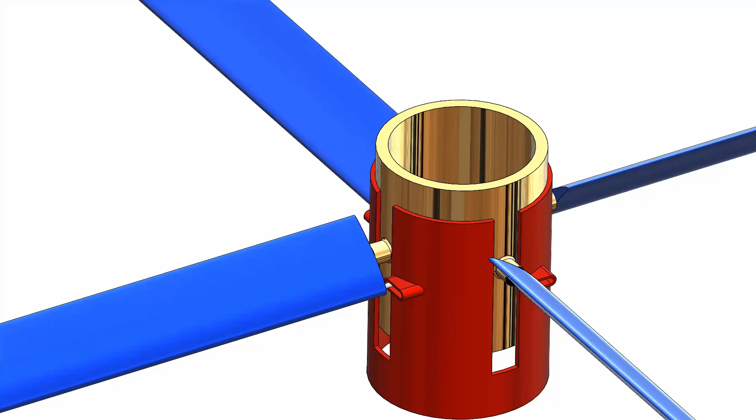Namaste guys, in this video we are going to learn how to make this rotor head mechanism in SolidWorks. We are going to make it completely from scratch and you are going to learn a lot of things.

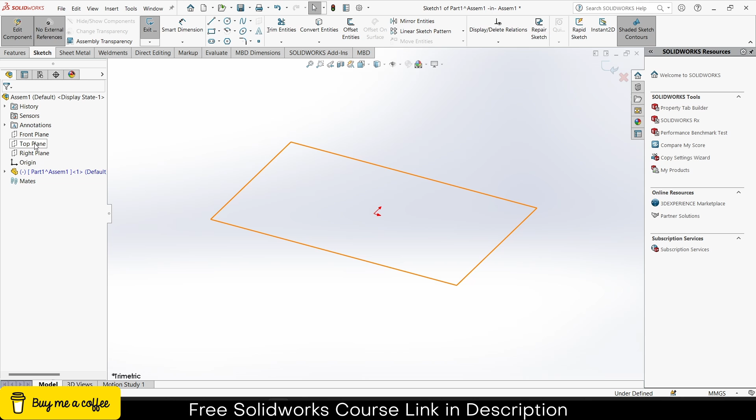So let's start. As you can see, I am currently in assembly mode. I am going to make all my parts in assembly mode for the sake of simplicity. Let's see how to approach this. First, click on Insert Components, click on New Part. Select the top plane, press Ctrl plus 8 for normal to the view.

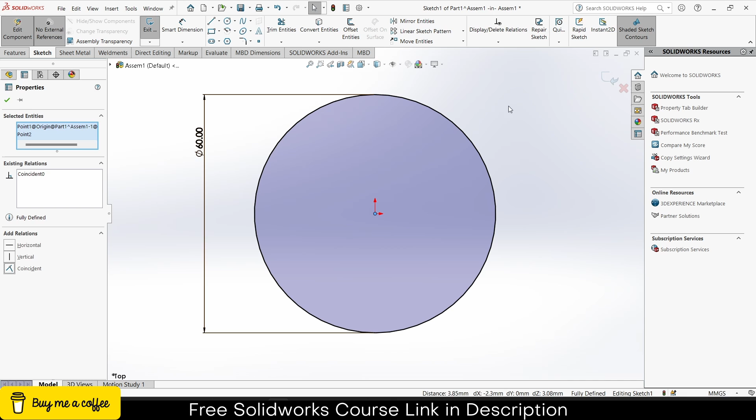Click on the circle. Now draw a circle as per your requirements. In my case, I am making it 60 mm. Press Escape. Now, as you can see, the circle color is blue, so it means it is not fully defined. So what I will do is drag this by pressing Ctrl, select the origin, and click on coincident. Notice now the sketch color is black, which means it is fully defined.

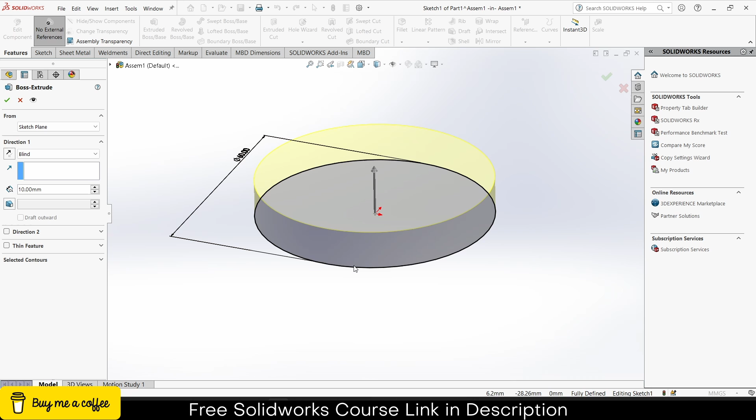Now go to the features, click on extrude. Now I want to create a hollow pipe, but it is not hollow, so what I will do is click on thin feature. I got some thickness. Now here I will increase some height—you can increase or decrease the height as per your requirements. So I'm making the height 80 mm and let's say the thickness is 5 mm. Click OK.

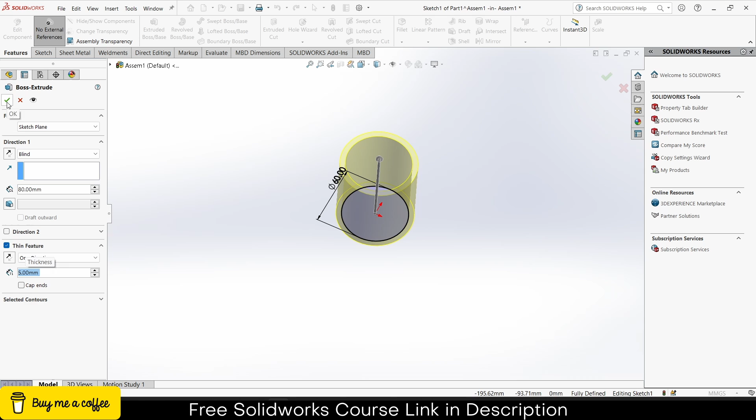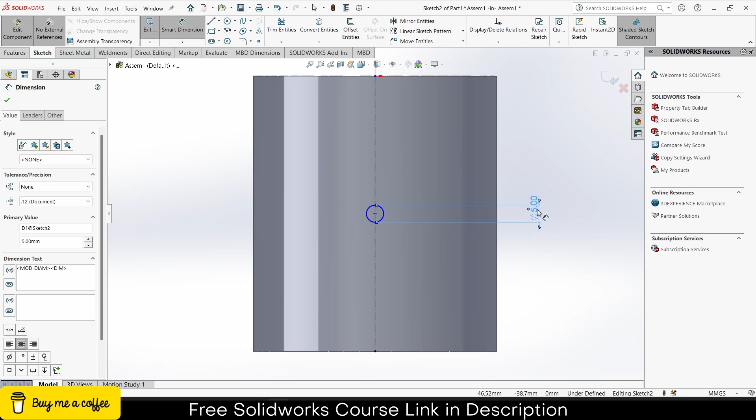Now I will select the front plane of the part, draw a center line here, press escape, click on circle, and draw a circle at the center of it. Give it a diameter as per your requirement—in my case, 5 mm is fine. Click OK.

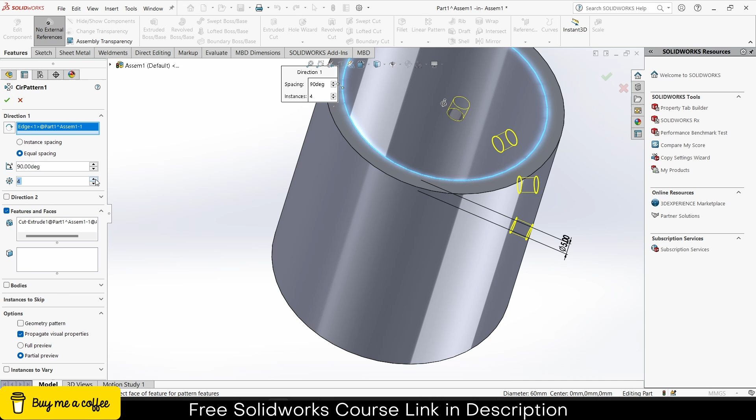Click on extrude cut, through all, click OK. But I want 4 more extrude cuts. What I can do is click on circular pattern, select the circular edge, and increase the number of instances. Notice some weird thing happening at 90 degrees, something like this. So basically I have to change it to 360 degrees.

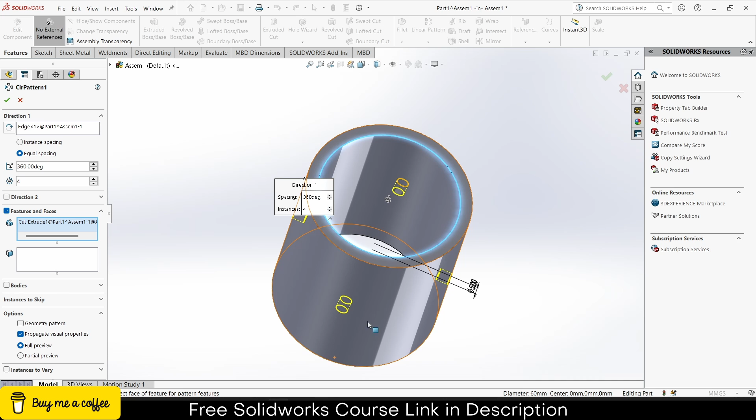In your case, it might be default 360 degrees and you'll get the correct results. Just in case it's not showing, make sure you go to features and faces and select your extrude feature—after that it will show you. If it's still not showing, make sure you click on full preview so it will show how it looks once you cut it. Now click OK. Notice it's cut—that's a good thing.

Again select the top plane, click on sketch. Now I will draw a circle here of the same size. Go here, extrude.

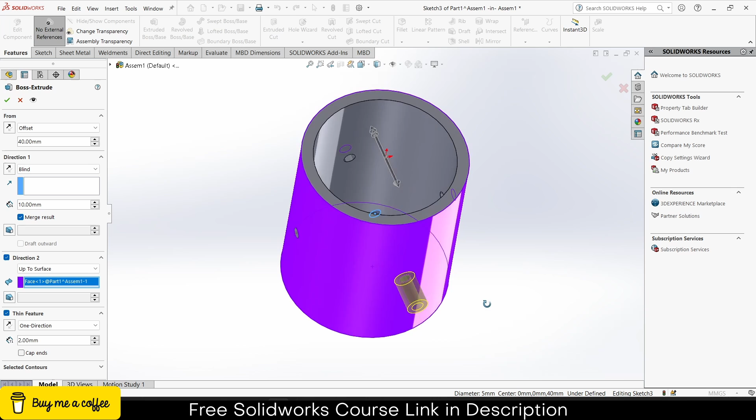Now instead of blind, click on thin feature, click on offset. What I am doing in reality is I want to extrude on this curved surface, but you can't make a sketch on a curved surface, so we are going to use some tricks. Let's make the thickness 2 mm, and in direction 2 click on up to surface, select this surface, and let's say this is 3 mm. Click OK. So this is how it looks like.

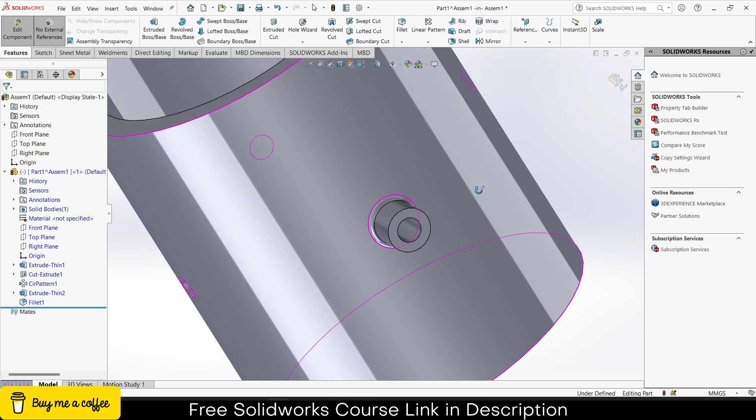Looks okay. Select this, click on fillet. Make it 1 mm, click OK. Now what I will do is click on circular pattern, select this, and select this feature and this feature.

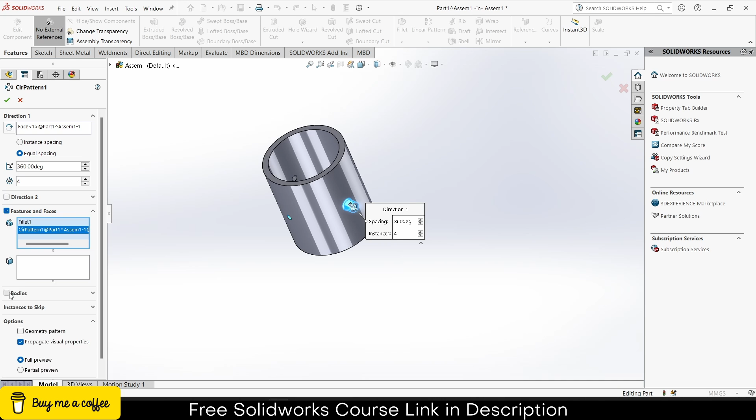Click OK. Unable to create instances, try again by decreasing this. If that sometimes happens, click on bodies. There are some chances, sometimes things don't go as the way you want. Okay, okay, my bad.

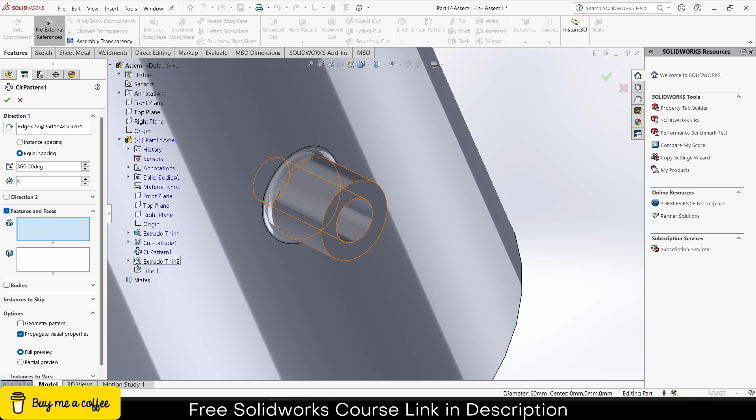Features, cancel this and select this. Delete this. Let's try to select the features from here. Now it's working. Sometimes you face different kinds of issues, so you have to make a habit of learning it. So click exit, that assembly component mode.

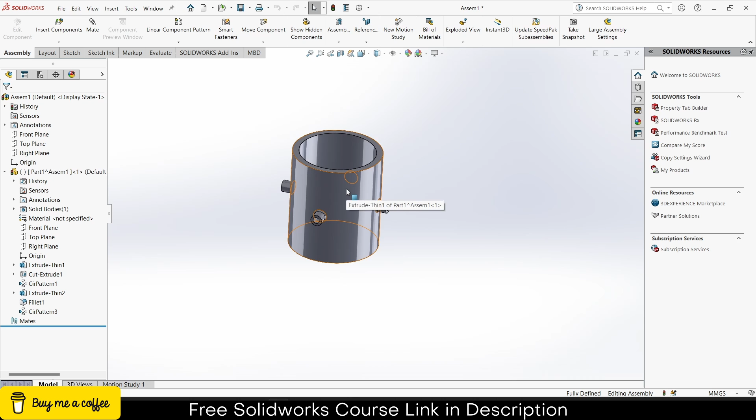So we made our first part. This part is going to be fixed, we are not going to move it. So what I will do, right click. Either you can do fix, or what I recommend is select the front plane of the assembly, draw a line, escape like this line, make it vertical. You don't need to define the dimensions of it, it's not necessary.

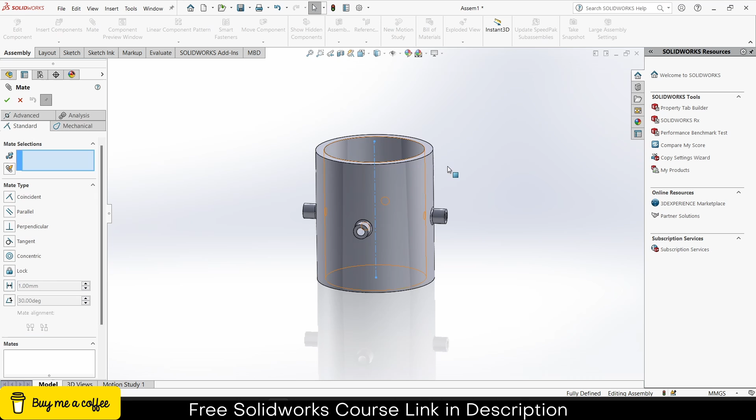Select this circle and this line, make sure it's concentric. Click OK. Select this, select the top plane, click on coincident.

So in that way you can see we have made it, but it is rotating. I don't want to rotate. So what I can do, select the right plane, go to mates, and the right plane of the assembly.

A question comes to your mind, why I don't right click and click on fix? Why is there a need to do all these kinds of messing things? The reason I didn't do it is very simple. If I make it fix, I don't know whether it's at the correct place or not. So it will be a problem for me when I do animation or motion analysis in the future. That's the reason I most of the time prefer using mates. There are very rare instances when I try to prefer fix or I align them correctly.

Notice this traffic light icon is there. So click on this rebuild. This is called the rebuild icon.

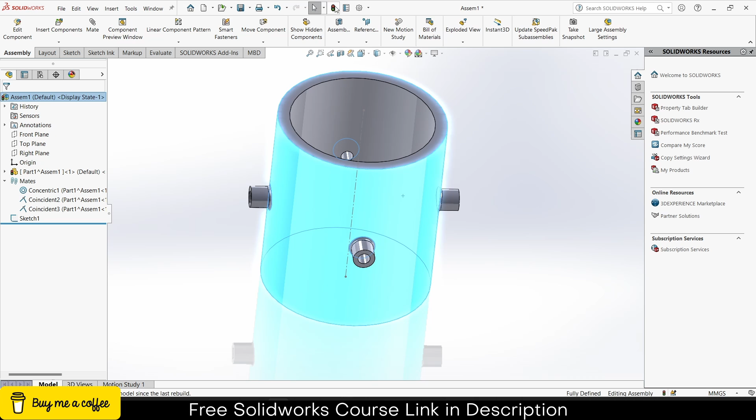Now let's make another part, this time I'm going to make the wings. Click on here, new part, and I will select the front plane, press Ctrl plus 8, click on midpoint line, draw the midpoint line like this. Select this line, make it construction. Select this line, make it horizontal. Select this point and this point, make it 40 mm.

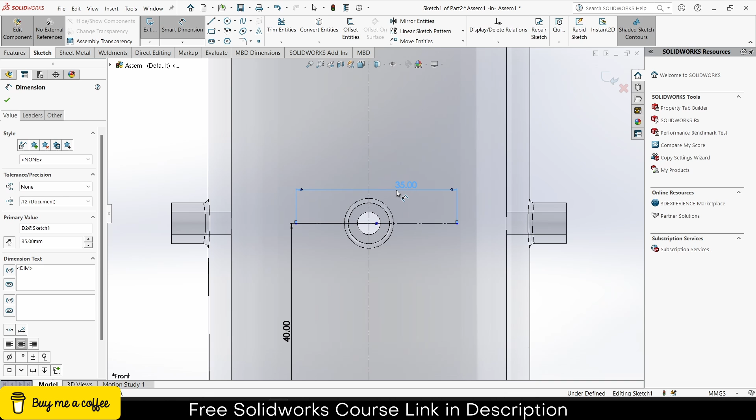Because when I created this, I know that total height is 80 mm, so I'm making it 40 mm. Now, what about its width? That's also important, so make it 35 mm, and make sure it's concentric.

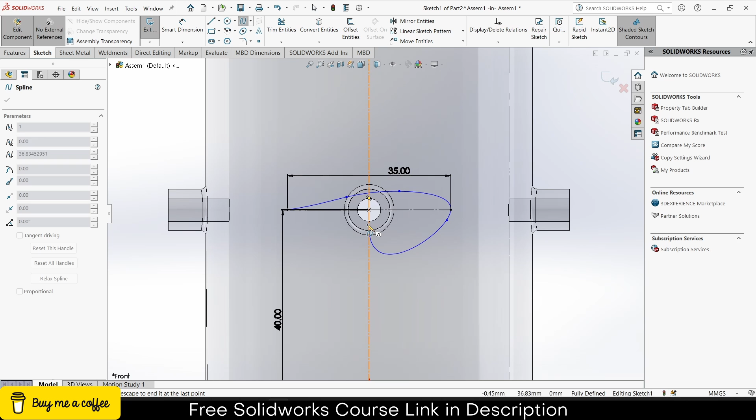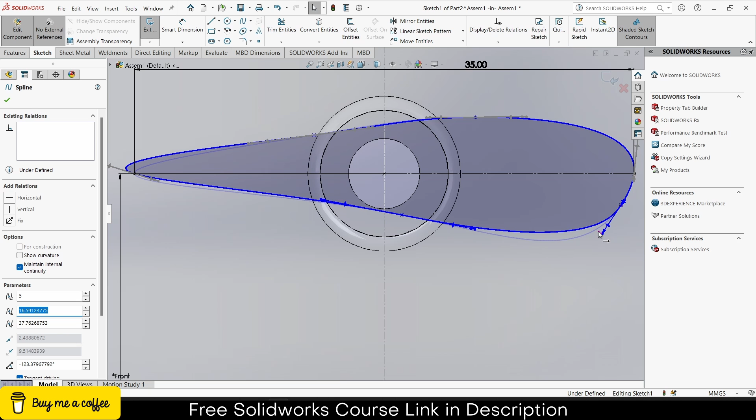Now to make the wing, what I can do is use this spline tool command. Escape. Now what I will do, I will select this, and let's make it correct. You can adjust the profile as per your requirements, it's up to you how you want to make the profile.

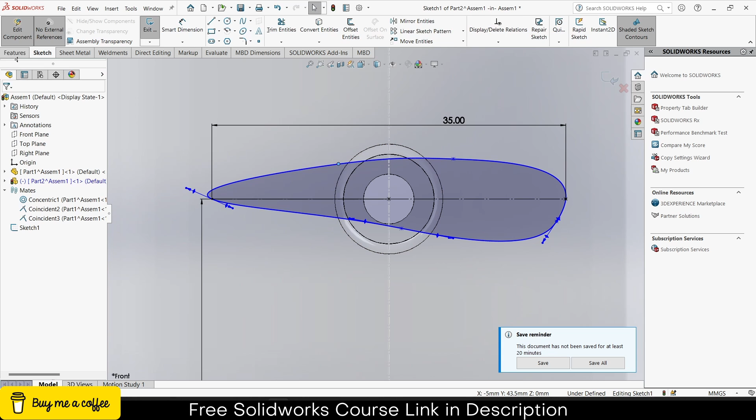So I think that's okay. Click OK, extrude it, extrude as per your requirements. Click OK, and I will select this face.

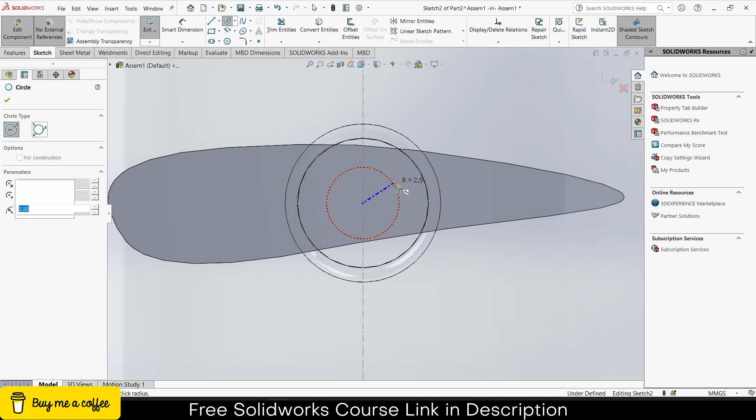Click on sketch, draw a circle here, 3 mm, oh, make it 4 mm, 5 will be fine. Click OK.

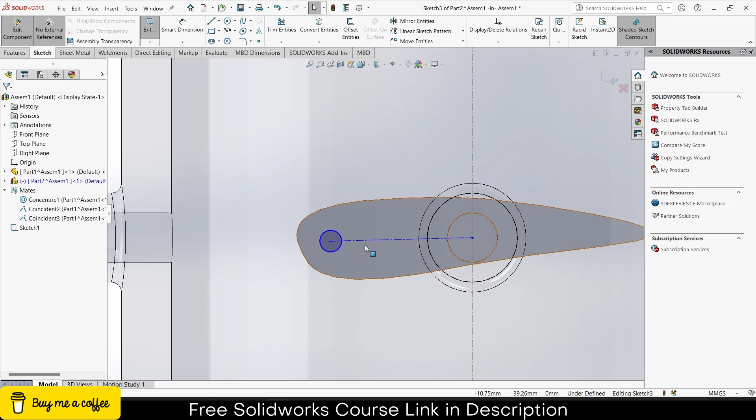And I will make one more, select this face, click on sketch, make sure that this circle is horizontal. Select this line, point, and this, make it concentric, make it 2 mm. Distance from here to here will be 14.1.

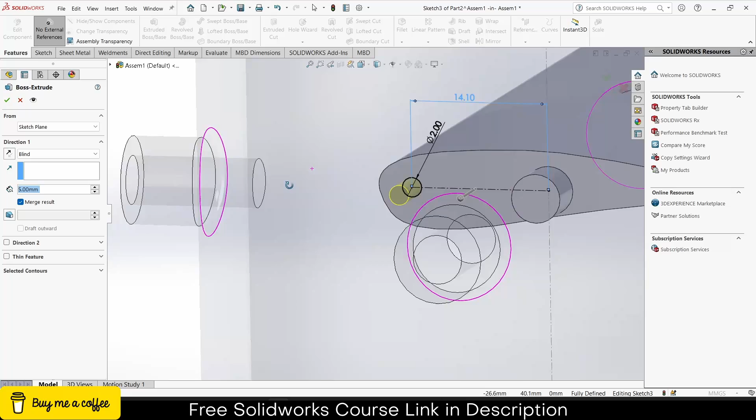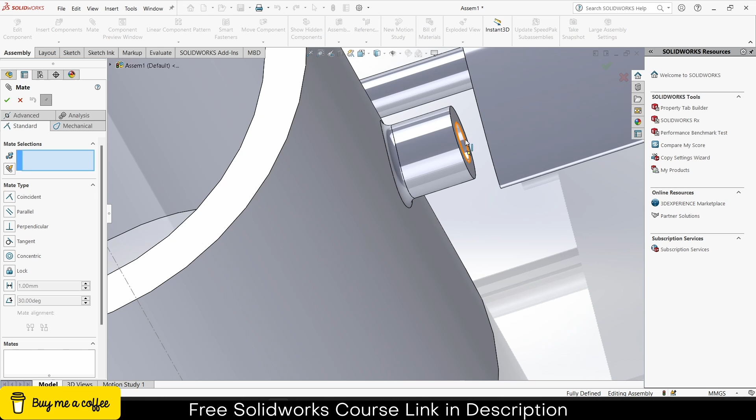Extrude 5 mm. Let's increase this extrude more because it is going to be inside of it. We can come back and increase or decrease as per our requirements. Now let's move, bring it back. Select this face and this one. Click OK.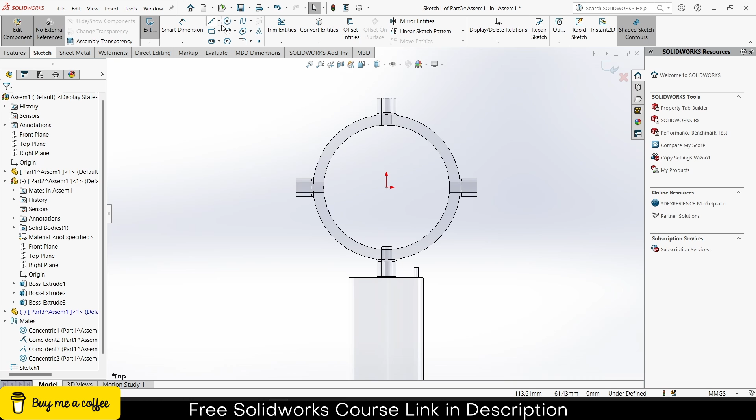Now I need something to make it fix, so what I can do, let's see. First thing that I have to do is create a new part. Click on here, new part, and I will select the top plane of the assembly. Press Ctrl plus 8. Draw a circle like this. What is fit? Diameter 70.

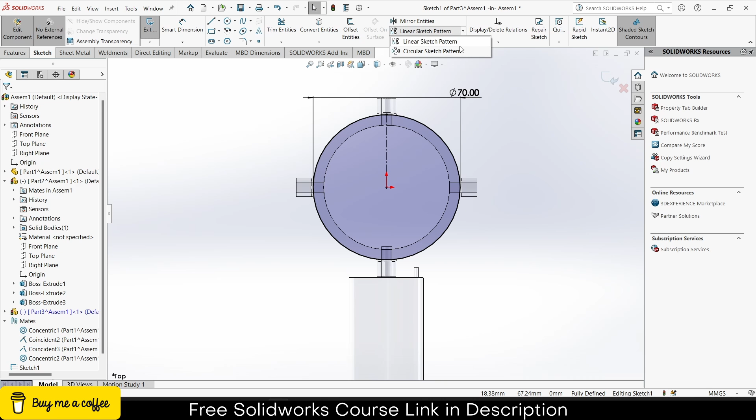Click OK, it is not fully defined. Escape by pressing Ctrl, select these 2 points, point inside. Circular pattern about this point.

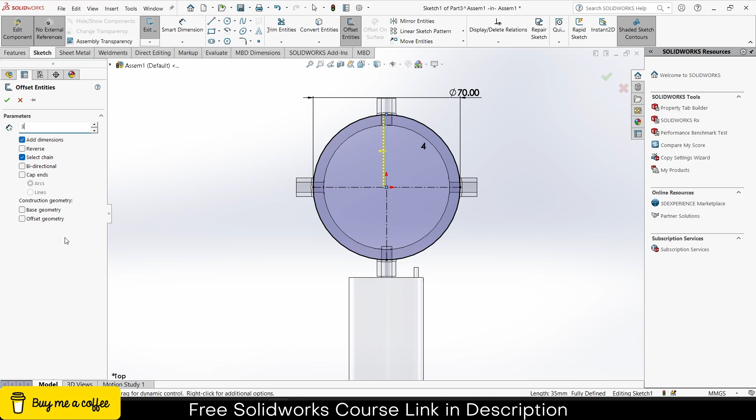Click OK, now click on offset entities. Offset about how much? 1.5, 3, 4, 5, 6 is fine. Make it bidirectional.

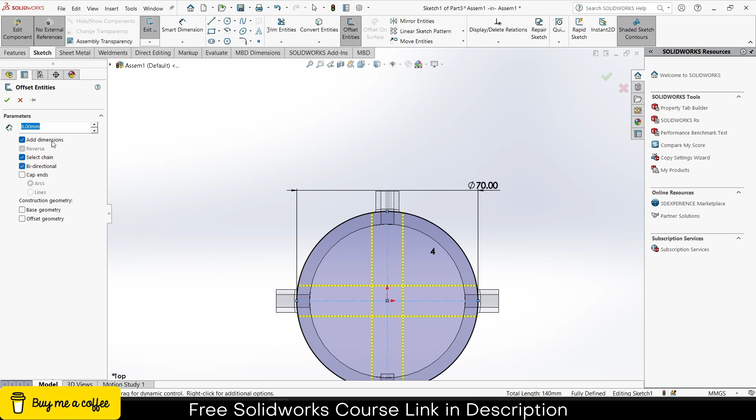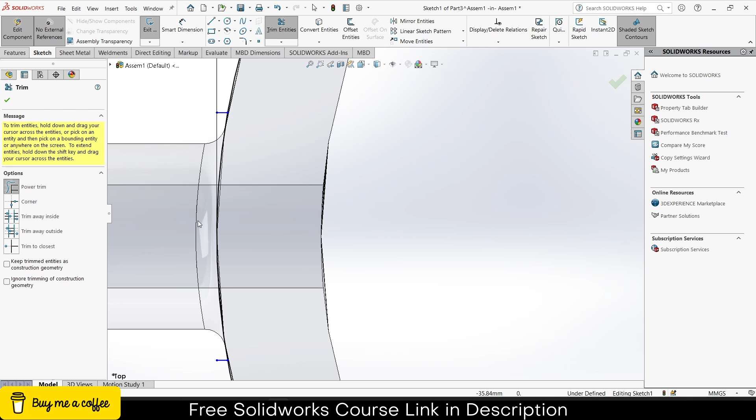Click OK. Click on trim entities. Trim the line that I'm showing. Now some people will say, why did you draw it if you are going to trim it? Just watch, you will realize why I have done it.

Go to features, extrude.

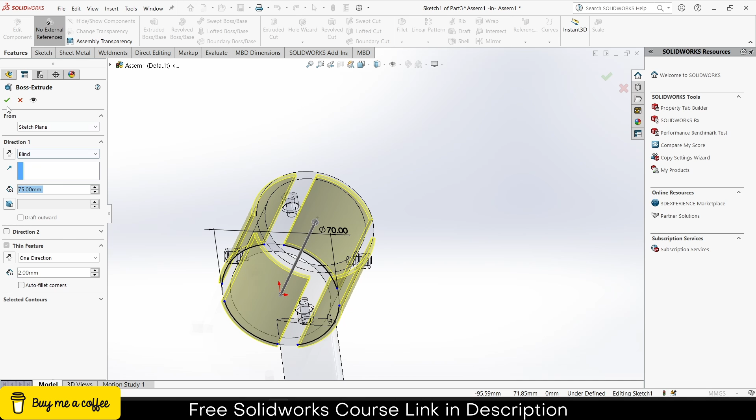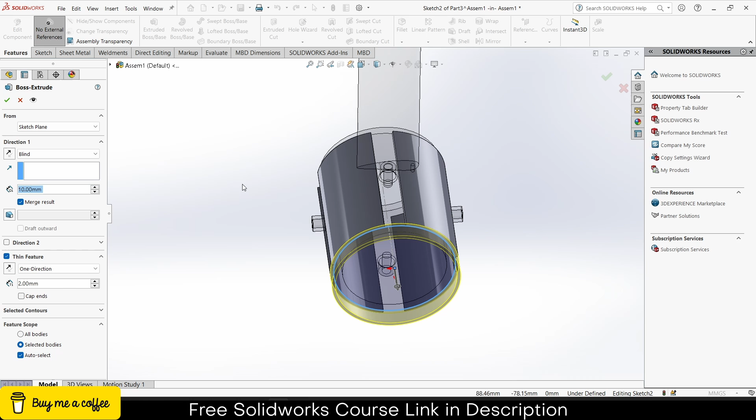Extrude, thin feature. Make it 10 or 20, you can make it as per your requirements. It's not that you have to follow me exactly.

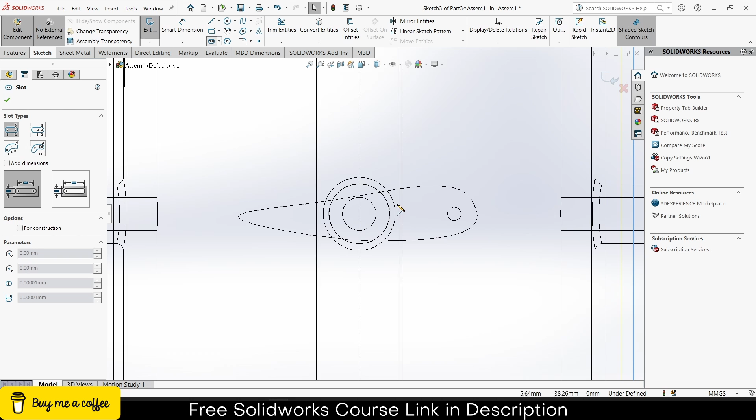Select the top plane and click on here so that we can see everything. Now what I will do is click on slot tool and draw the line like this.

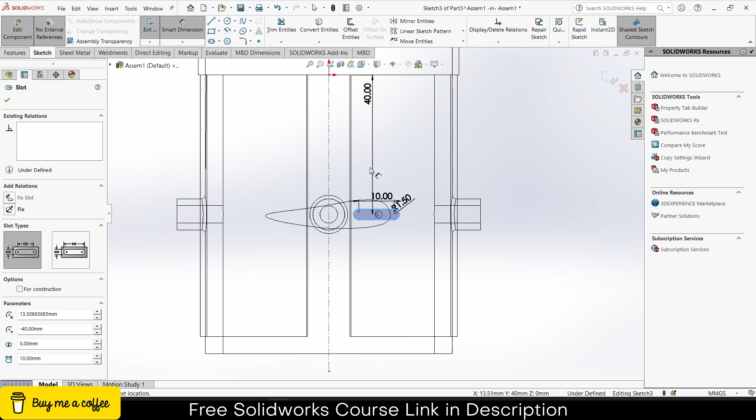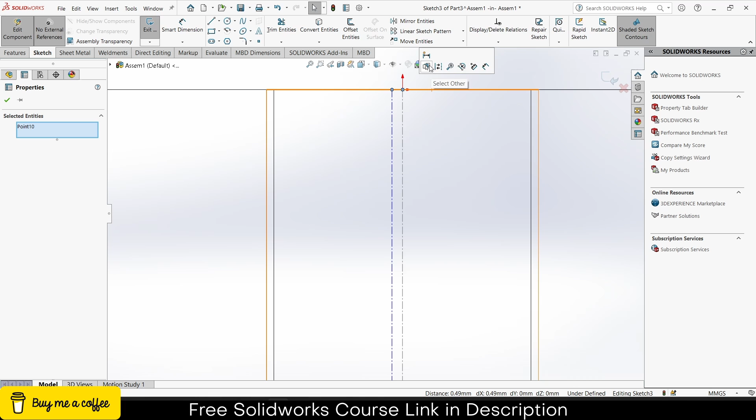Why is it not selecting the origin? Make it 0 and make it fixed. Now you see, it's good.

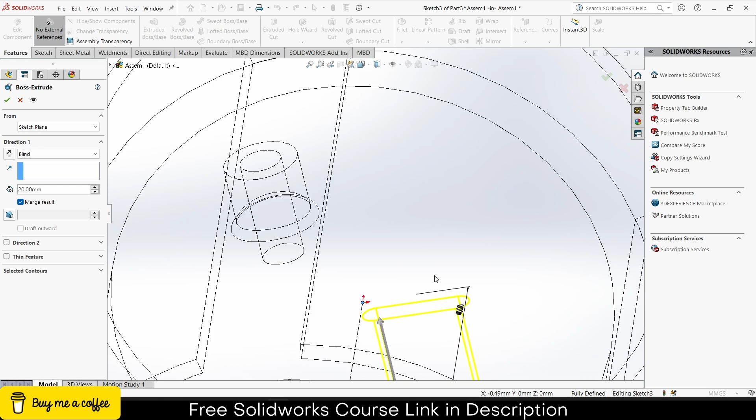Go to the extrude, click on this, reverse direction, offset, reverse direction of the offset as well.

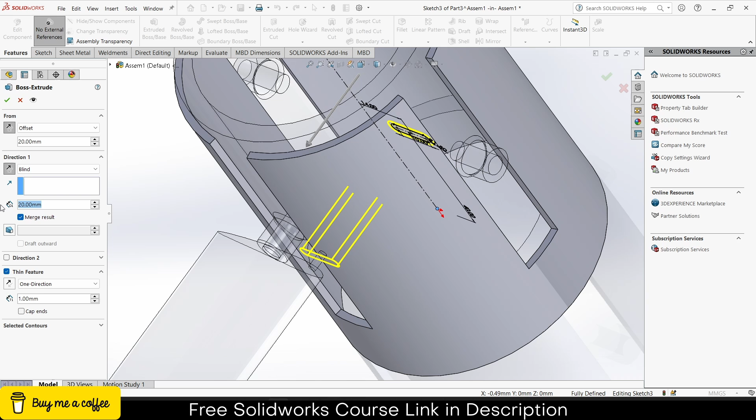Go to the thin feature, increase the thickness to 1, make it 3 mm, increase the offset distance, click on...

Click on up surface first, click OK, exit.

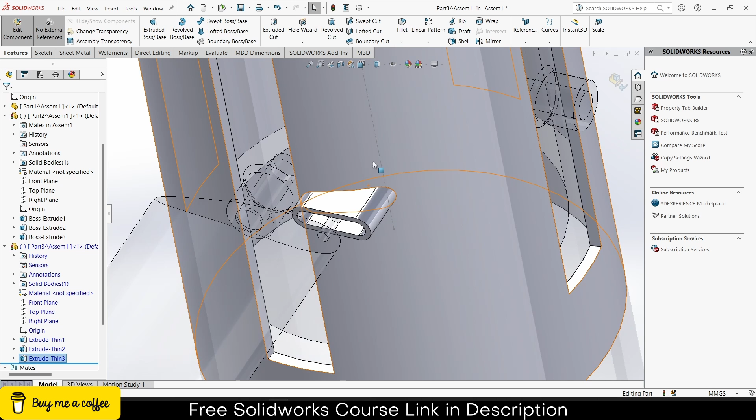Now what I need to do is go here, select this, go to the mechanical, click on slot, select the slot and select this, click OK, select this face and this face, go to the standard, click on coincident, click OK.

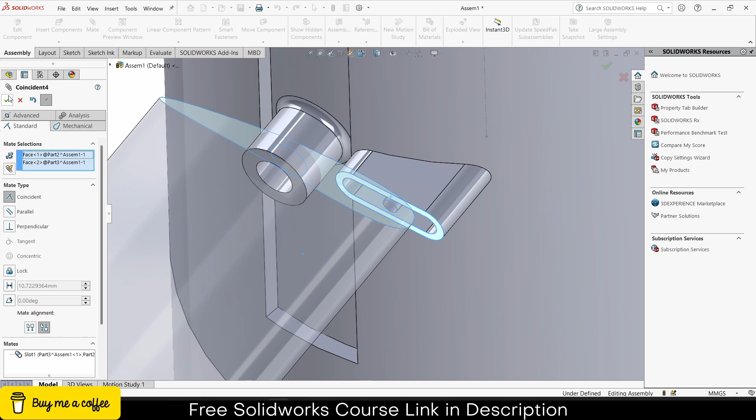Notice, okay one more thing, select this and this, make it concentric. So if I move forward and backward, you can see how it's doing.

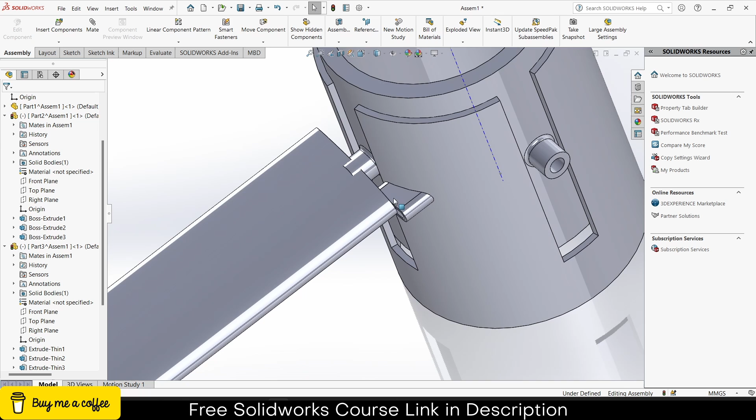Before I move forward, let's make it a little bit fixed. As you can see, it is interfering and that's not a good thing. So I think this one, click on it, edit.

So let's click on distance, 3. Okay.

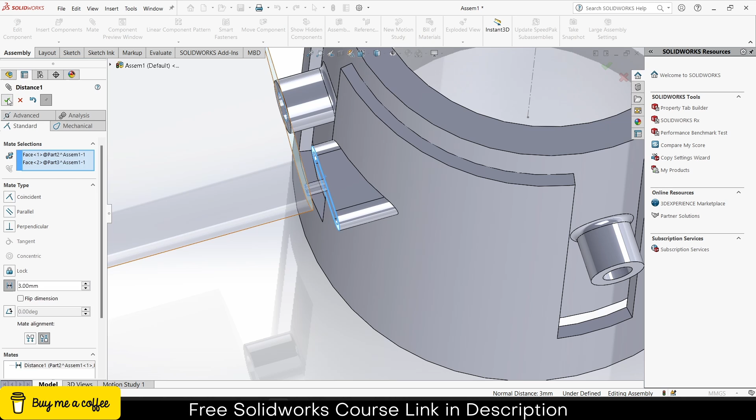Notice this is working quite fine, but I want 4 more blades.

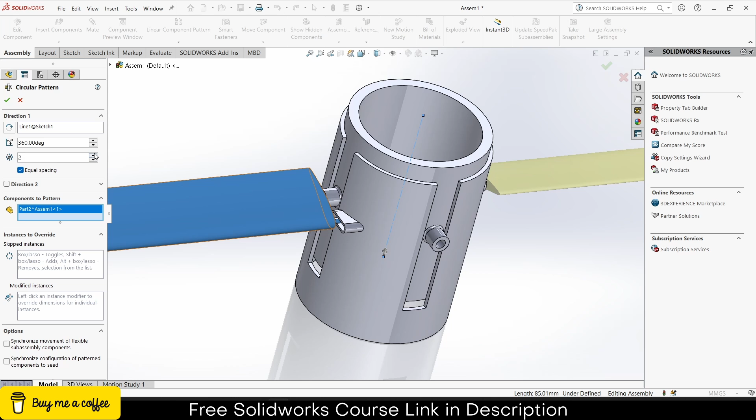So what I can do is go here, click on circular pattern, select the axis of origin, select this which I want to do pattern, this one, how many, 4, and click OK. Okay, one issue I forgot, I didn't make this 4 as well.

So select this part, edit components, and I will go to the circular pattern, select the circular axis, which pattern I want to make, this one, how much, for 360 degrees, click OK. Exit edit component mode.

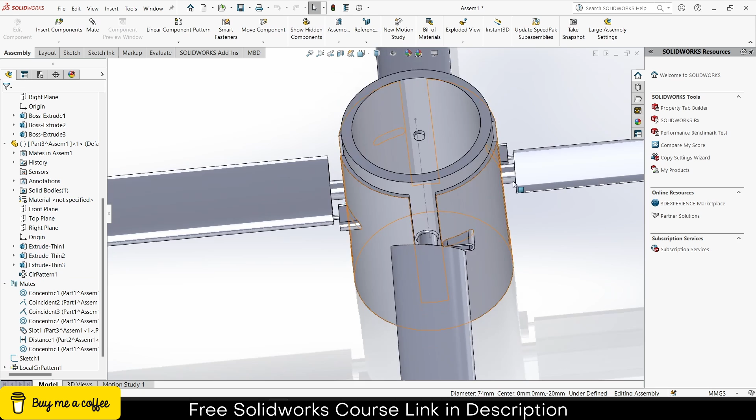Looks good to me. Now you can give them some nice coloring and anything else, and that's it.

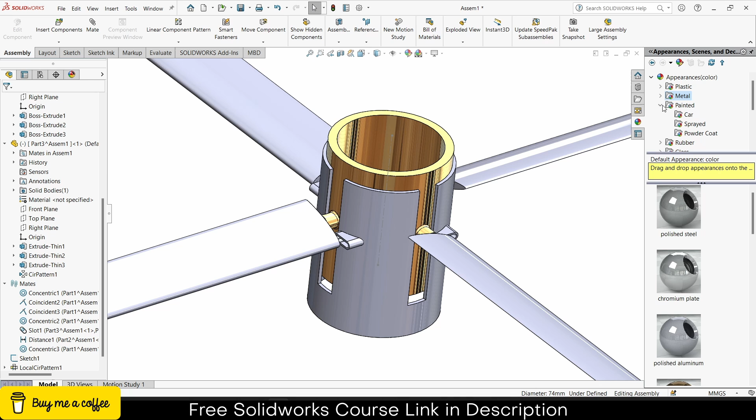Metal, let's give them some gold, polished gold. And let's see what other colors we have. Looks kind of good.

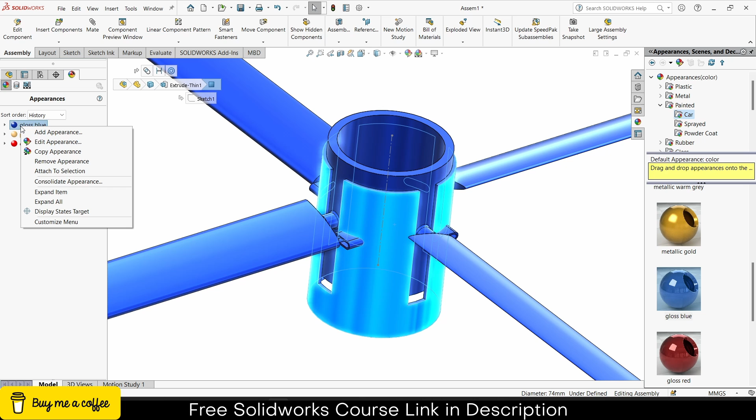So go here, right click on gloss blue, remove appearance, drag and drop it here, click on this icon to hide this, go to the motion study.

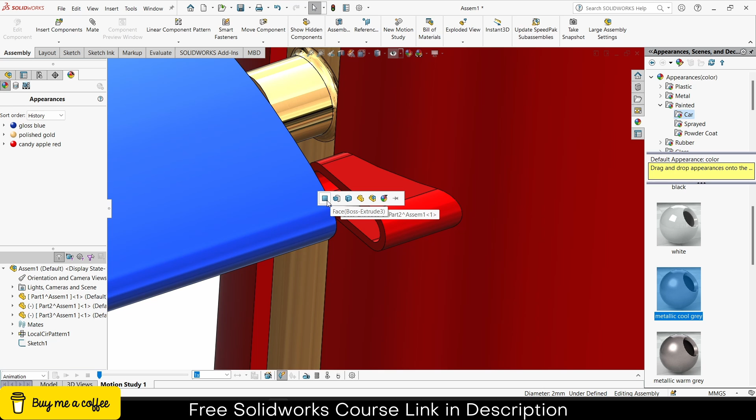And for this particular face, let's give it some different color so that people will realize, hey, this is something different. Select this and drop, click on the surface so that people can see that this is a different part.

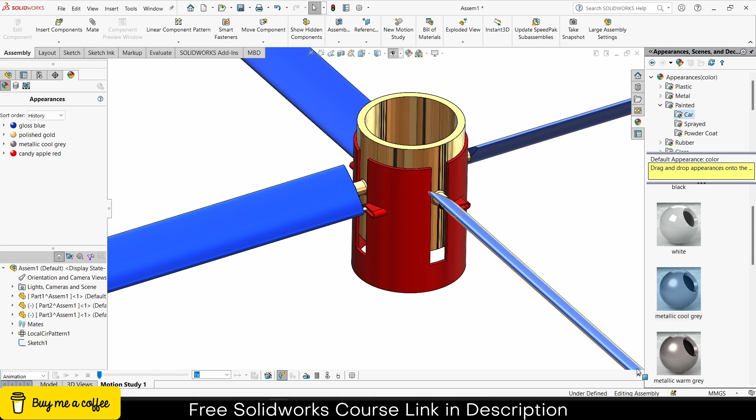Now let's try to animate it. So I will go backward to this position, and what I will do to animate it is go to this one, disable it, go back here.

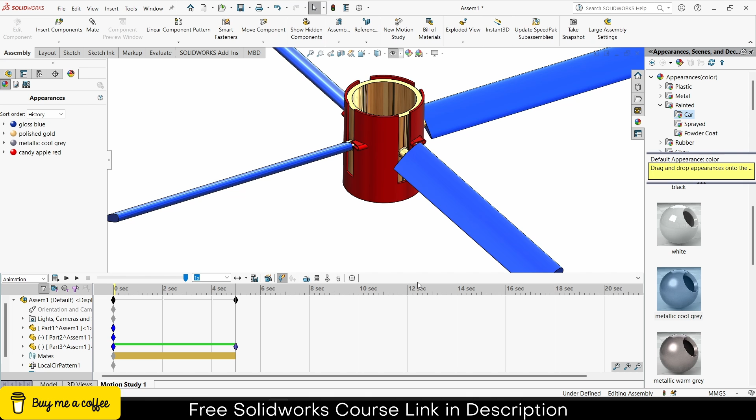Also, here's a little task for you. Now, the problem with this mechanism is that it can go forward and backward too much. So you want to control how much forward, upward, or backward it can go.

So what you can do is go to the mates. There is something called advanced mate, by using it. Now I leave this task to you, how to use it.

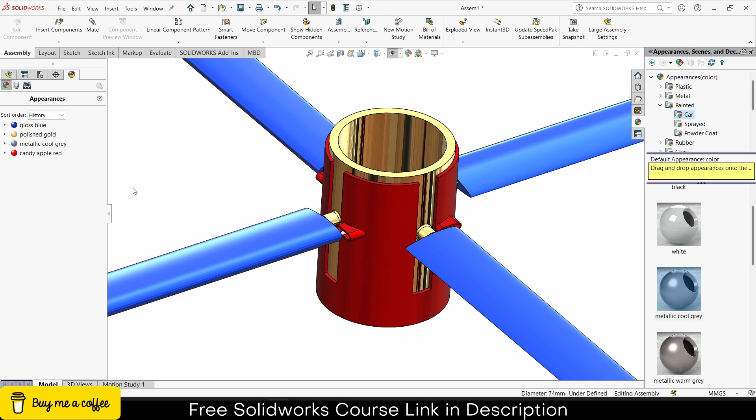Now to animate it, simply click on this, calculate, and voila, your animation is done.